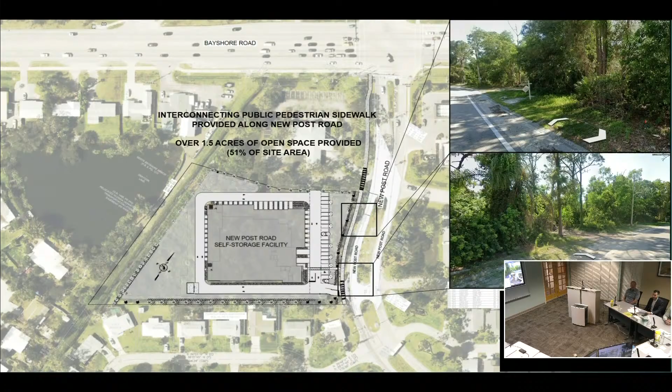The date is June 26th, 2025, and this is case DCI2023-00013. It is a rezoning request to the CPD zoning district for property on New Post Road in North Fort Myers.

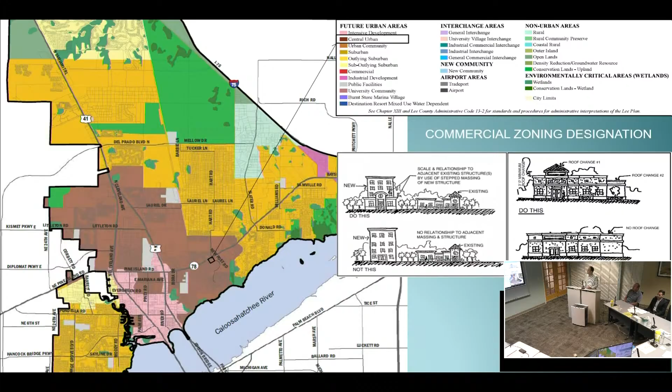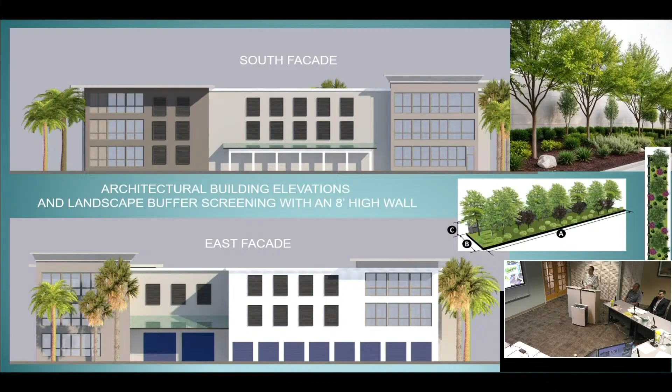That summarizes my explanation of the project. Other than that, we are providing a sidewalk along the frontage of the property going north from our site to Bayshore Road, connecting to existing pedestrian facilities there. I think that wraps it up.

You have the master concept plan. Was there a slide for that? Could you pull it up? If you can just walk through the master concept plan and the circulation. This is the closest thing for that. We can go over it. So what specifically would you like me to discuss?

I'm curious about the dumpster placement, for example, being on the residential side. I'm curious why it would be at the rear of the building closest to residents and not, for example, in the north corner somewhere. I think it's a buffer requirement.

On the west side of the property there's a 40-foot FDOT drainage easement that is untouched. We cannot develop on it, and it stays untouched as it provides drainage for our side and the sides north and south of our property. Next to that, there's a 5-foot buffer adjacent to the commercial zoning, and then there's a 50-foot buffer.

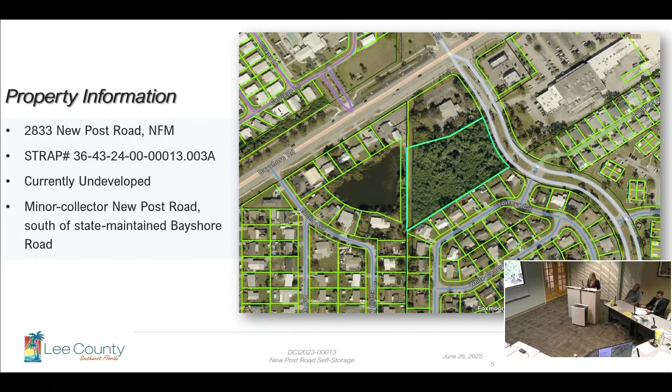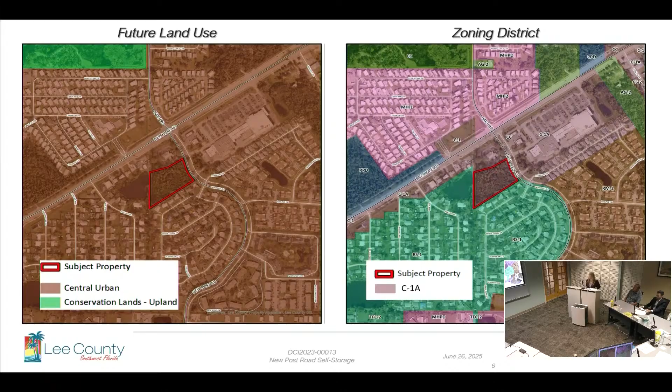The subject property is an undeveloped parcel located at 2833 New Post Road in North Fort Myers. It consists of one strap number and lies along the county-maintained minor collector New Post Road, just south of the state-maintained Bayshore Road, and is within the Central Urban future land use category established by the Lee County Comprehensive Plan, and as stated, is currently zoned commercial C1A.

Surrounding development includes the Foxmoor Plaza to the northeast within the community commercial zoning district, labeled CC on the map, and directly to the north, a C1A zoning district lying along Bayshore Road. To the south of the subject property is the Foxmoor Pines residential neighborhood, zoned RS1, as well as Berts Bayshore Manor to the west.

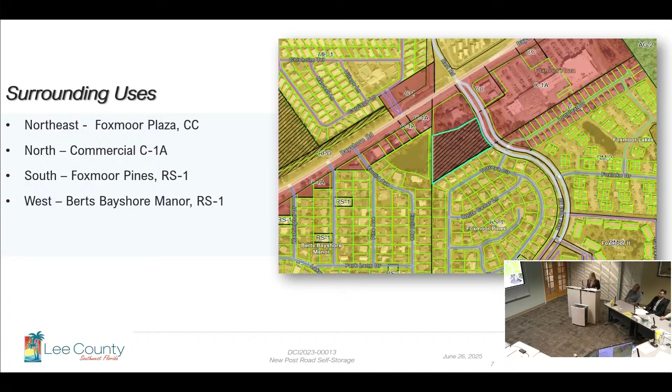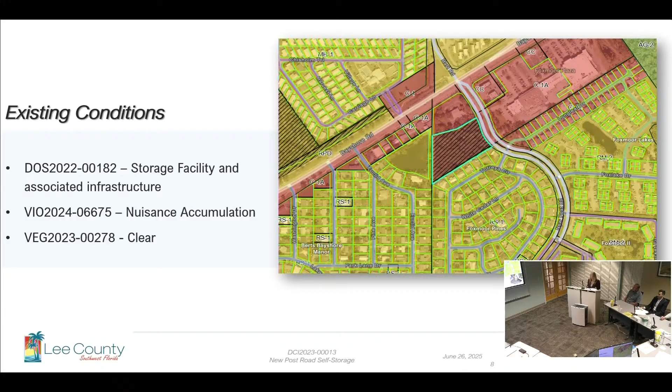The project currently has a development order in review for the storage facility and associated infrastructure, and the applicant submitted for a veg permit as well under VEG 278. A code violation has been issued for the nuisance accumulation on the property, and the veg permit cannot be issued until the rezone and the development order have been approved, which may help in mitigating that code violation.

Covering Lee Plan criteria under LDC section 34-145, the following slides will demonstrate how the applicant has met the listed criteria for a rezone and plan development.

In covering Lee Plan consistency, as previously mentioned, the parcel is located in the Central Urban future land use category, which by the Lee Plan is described as the urban core of the county. Pursuant to Policy 1.1.3, the project site is in an area that encourages mixed development use, and the proposed project contributes to the mix of uses that does provide service to the surrounding community. Mini warehouse and public warehouse uses are allowable uses within a commercial plan development, and the mix of commercial and residential uses is consistent with the goals of the Central Urban future land use category. The proposed development will serve the surrounding community and remains compatible with other uses in the surrounding area.

For Objective 2.1 of the Lee Plan, this promotes contiguous and compact growth to contain urban sprawl. The request, if approved, will allow infill development that promotes compact growth patterns.

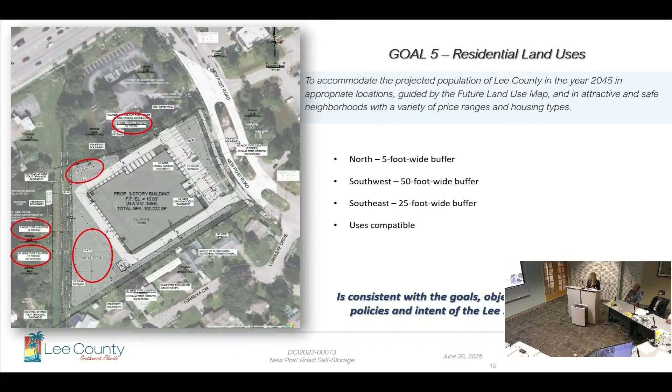For the commercial land use portion, Goal 6 of the Lee Plan seeks to permit orderly and well-planned commercial development at appropriate locations within the county. This property is located just south of Bayshore Road, as we've already established, with other nearby existing commercial and residential zoning districts. The applicant has provided a traffic impact statement for the proposed project that concluded the project as proposed will not create a significant or negative impact to the surrounding roadway.

It does verify all roadways within the project's area of impact currently have a surplus of capacity to accommodate the traffic associated with this use. Lee County Department of Transportation provided a transportation-related analysis stating that the proposed project will not have a detrimental impact on the surrounding roadway system.

The applicant-provided master concept plan depicts adequate landscaping and buffering. And again, urban services are available to serve the proposed development.

The applicant's environmental report indicated that there are no plant species observed that would be classified as wetland dependent. In addition, the applicant also provided the required stormwater management plan indicating historic drainage of the property outfalls to the west into the existing county ditch that runs through the western property boundary, and again that it proposes that dry detention system with a control structure that discharges into the existing county ditch along that western side.

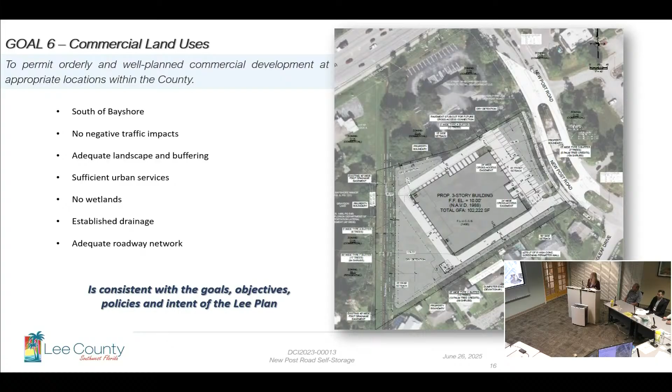For Goal 30 of the North Fort Myers Planning Community, as previously mentioned, that's where the parcel is located, and it is within existing commercial and residential uses and provides compatibility with the surrounding area. It does not locate development in a way that would open new areas to premature, scattered, or strip development, which is consistent with Goal 30 of the North Fort Myers Planning Community. Further, the applicant did hold the required public information meeting for this particular goal in the Lee Plan.

For Lee Plan water quality Goal 125 and Goal 126, the applicant again did provide the required stormwater narrative indicating that the proposed project's stormwater discharge is regulated by a control structure to ensure water treatment prior to discharge, and indicated the development will not degrade surface and groundwater quality.

The applicant's proposed on-site dry detention system conveys that runoff via a system of berms, swales, and an outfall control structure that discharges below the dry detention system, and it maintains the surface water flows and groundwater levels at or above the existing conditions.

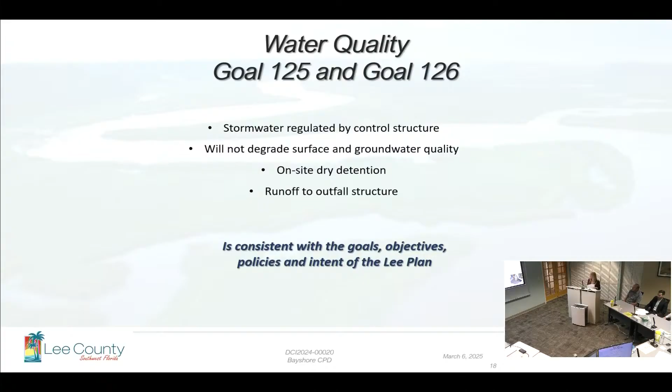And lastly, for Lee Plan, Goal 158 of the economic element states Lee County will achieve and maintain a diversified and stable economy by providing a positive business climate that assures maximum employment opportunities while maintaining high quality of life. This proposed rezone to CPD allows for businesses and employment opportunities to the North Fort Myers area while providing the expansion of service to the surrounding community. The property resides in the central urban future land use category, which does encourage the greatest range of public service.

Further on to the criteria for meeting the code and other applicable county regulations, the applicant has acknowledged that at time of development, land development code and other applicable county regulations will be required. The applicant originally did request one deviation pertaining to reducing the required dumpster enclosure size. Staff did recommend withdrawal of this deviation request because the land development code already provides a note that covers the calculations for mini warehouse use, which is a note section below the use table.

LDC Section 10-261 note 1 states mini warehouse and other associated developments with storage must calculate the minimum enclosure size in relation to the square footage of the office and the caretaker's residence. So they would not need the reductions they were asking for in a deviation, since it's already covered in the land development code.

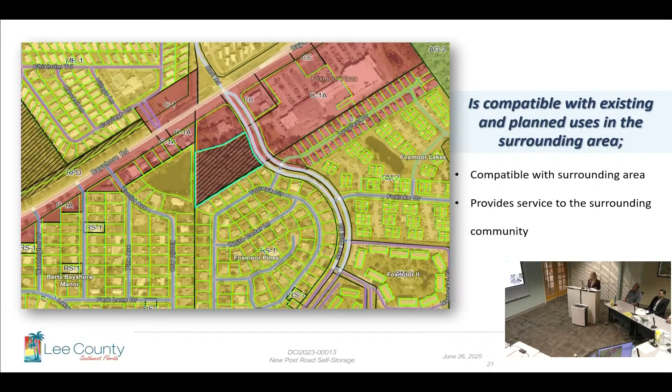So again, as we've already established, for compatibility with the existing and planned uses in the surrounding area, the parcel is located within an area developed with existing commercial and residential uses. It is compatible with the surrounding area and does not locate development in a way that would open areas to premature or scattered development.

For providing access sufficient to support the proposed development intensity, the property is located just south of Bayshore Road and New Post Road. Access is proposed via a 24-foot wide vehicular driveway onto New Post Road and a cross-access easement on the northern piece of the property for access to the north.

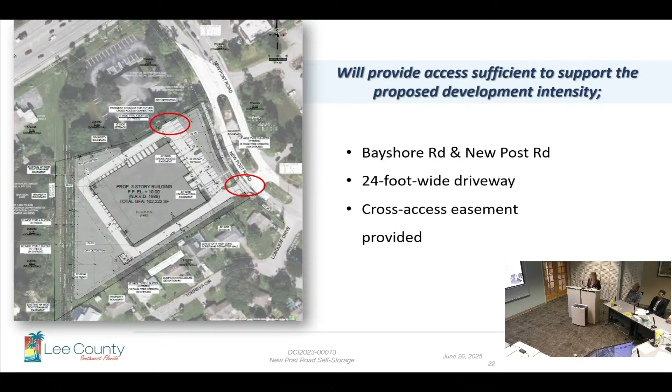A traffic impact statement was proposed for the project. It was submitted and concluded that the request will not create a significant or negative impact to the surrounding roadway network.

For environmental impacts, the required protected species survey and associated environmental maps were provided. They indicated there were no plant species observed that would be classified as wetland dependent, no significant hydrophytic vegetation was identified on the site, and no evidence of protected species were observed on the property.

In addition, a stormwater management plan indicating historic drainage of the property outfalls to the west onto the existing county ditch that ran through the western property line or property boundary, and the project proposes a dry detention system.

County environmental staff did provide a report and visited the site. They made the following findings.

For open space, the applicant has proposed 1.414 acres of impervious area, which in accordance with LDC section 10-415A requires 20% open space. The master concept plan provided the project area breakdown, which states the impervious proposed and the open space calculations demonstrate that the site is required to provide 0.587 acres of open space on a total acreage of the site being 2.93 acres.

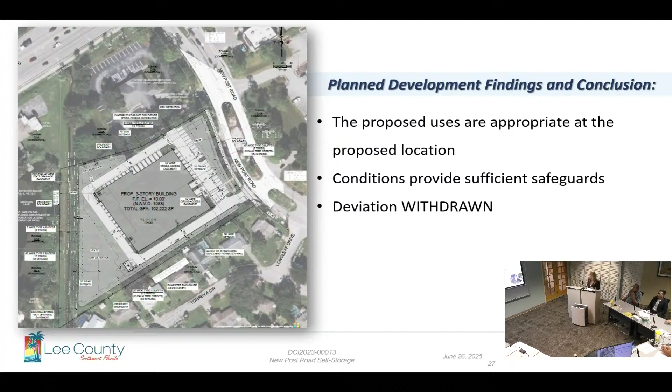In conclusion, the requested amendment meets the review criteria established in LDC section 34-145. Therefore, staff does recommend approval of the applicant's request. That is the end of my presentation, unless you have any questions.